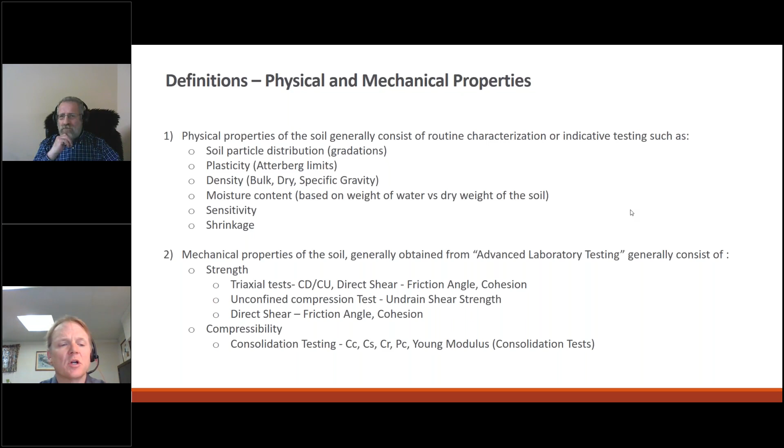These are some of our more routine tests and indicative tests that we use. Everybody uses these. They're very consistently used throughout the industry. Some of the mechanical properties that we're talking about, we've defined them more along the advanced laboratory testing, where we're looking at strength of material, triaxial tests, compression tests, shear tests, compressibility tests. So that's kind of the route we've taken with our physical and mechanical definitions.

So we're going to start here with our introduction. Many of our projects at TTC, we do have a lot of small sites that we work with. We also have projects with limited budgets, and that's pretty consistent throughout the industry. You have small projects, but also larger projects, and we all carry out routine characterization testing. The advanced testing, when it is carried out, many times, coming from a consulting background, I know it's very difficult to encourage a client to spend money on it.

It's very difficult to encourage a client to spend $2,000 or $3,000 on a single test, especially a triaxial test. So those are usually carried out in limited numbers, 2 or 3 at most, depending on your project budgets. Most times, I find, when I was working in consulting, it was consolidation tests that you could try and get carried out.

The end result is that engineers and designers tend to resort to more empirical relationships, based on your experience and what's been published in previous textbooks, papers, manuals, etc. Some of the concerns we've raised are: how relevant are these parameters to the soils that you're looking at? Is a soil from somewhere in Europe or Asia relevant to the Toronto area? Perhaps they are, perhaps they're not. It's hard to say. How many tests were carried out? Are they statistically significant?

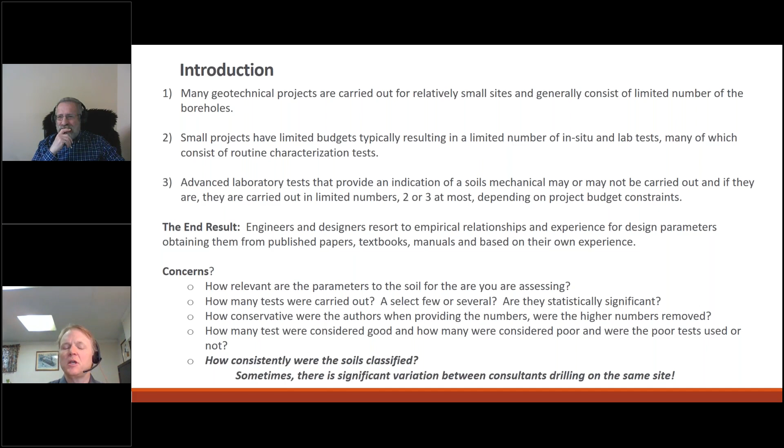Sometimes there's a variation between consultants, and we find even in our own projects, two consultants can go to the same drill site and come back with varied soil parameters and soil recommendations. Even down to the description of the soils can be different as well.

So our ultimate goal in what we're doing right now is to have a consistent method for grouping our soils for all of our projects. We're in the process of creating a database of both physical and mechanical properties, and eventually we're going to look at including some of the hydraulic properties for each soil group. We're going to continue to compile and add to this database over time. One of the things we also have to try and do is monitor and ensure that the soil groups are consistent and maintained so that we don't get crossover.

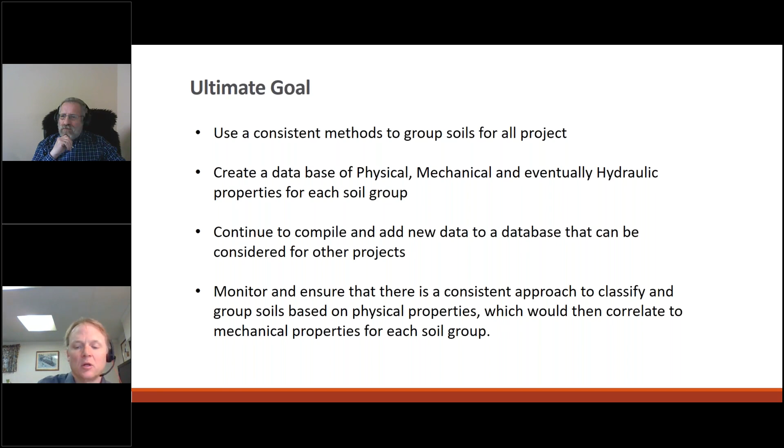So our data sources for this, some of the more well-known projects, are the Relief Line South and the Scarborough Subway Extension. Both of these have since been transferred to Metrolinx.

So we're going to start with our soil grouping. We established our soil grouping using grain size and Atterberg limits. Our initial assessment was on over 600 tests from our own projects throughout the City of Toronto, and we established 7 groups.

You can see them on the right side of the screen, G1 through G7. We did create 2 subgroups, a cohesive group and a non-cohesive group. Within the glacial tills, you have cohesive and non-cohesive glacial tills. As we moved down through the projects, we found that we also had cohesive and non-cohesive silts, so we broke group 5 into a non-cohesive and cohesive material.

Initially the system was used for our 2 major projects, the Relief Line and Scarborough Subway Extension, but since then we've expanded it to use for all of our projects and all of our investigations. It is allowing us to consistently organize the soils and all of our lab results.

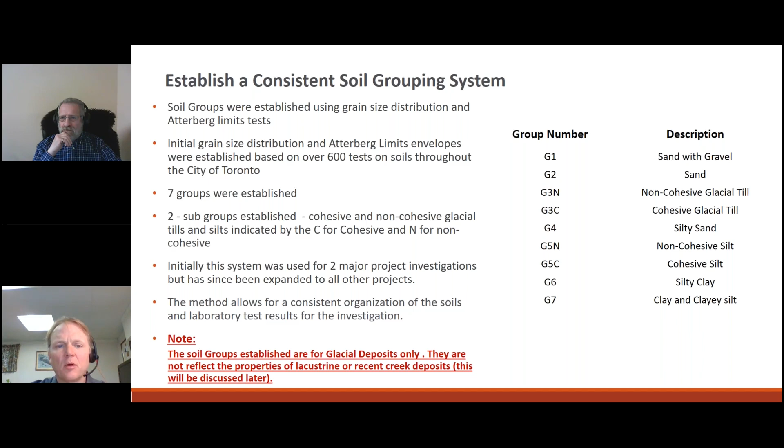One comment we have, though, is that this soil group is established for our glacial deposits only. They're not reflective of the properties of lacustrine or creek deposits. If you're working anywhere near the waterfront, any creek deposits, close to creeks etc., these soil groups will not work. We're still working on and looking at how we're going to classify those soils, but these are primarily for the glacial materials you'll encounter in Toronto.

So here's some of what we looked at. The thick black lines were our initial kick at the can, based on our 600 grain sizes. Then you can see the Relief Line and Scarborough results are the multicolored lines. We get fairly good agreement from our initial kick for sands and gravels, with a little bit of spread going beyond the lines. And for the silty sand, sandy silts, we had fairly good agreement as well.

We also did the same thing with our non-cohesive glacial tills and our cohesive glacial tills, and you can see that they bounce around a little bit. So based on our initial 600 grain sizes, we were able to revise and modify our envelopes for these, and this is what we ended up with.

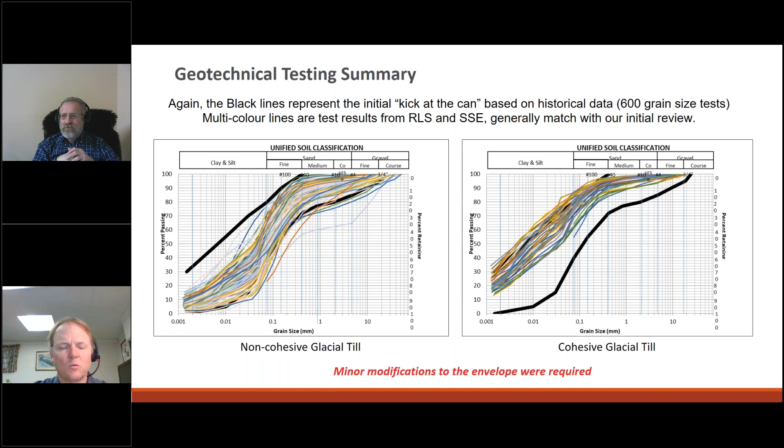So in this area, let's see if I can get a laser pointer — there we go. Up in this area we have our group 1, which is sand and gravels, group 2 on this side, and then we've combined them where we have our grain size with our Atterbergs for each group. So this is the non-cohesive, followed by the cohesive glacial tills, group 4 being the silty sands, and then we get progressively finer until we get to our group 7 down in this area, which is the clays.

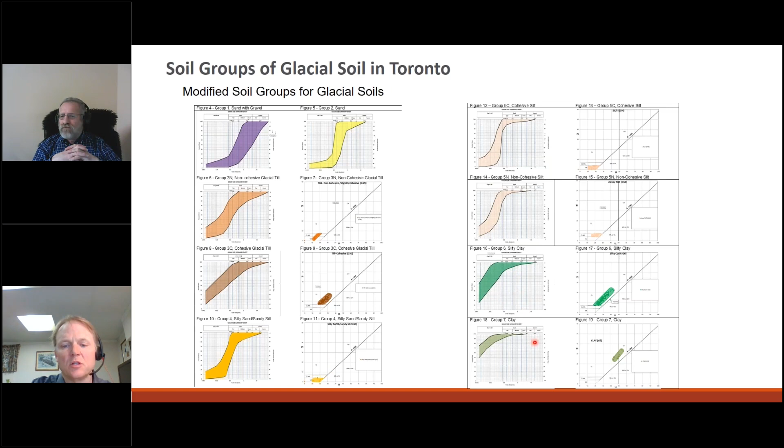So we get into the clays. Now with the physical properties, because we had two large major projects, we were able to combine everything and get a really good idea of the soils and their physical properties.

So we've come up with a number of charts you can see here for moisture content, for example. This is all of our soils by group, starting in the upper left for group 1, sands and gravels, all the way down to clays in the lower right, G7. These charts are based on about 8,000 to 9,000 tests in total. In both projects we did a moisture content on every single soil sample that was pulled out of the ground, and this is our result. So we have a pretty good feel now for moisture content of the glacial soils in Toronto.

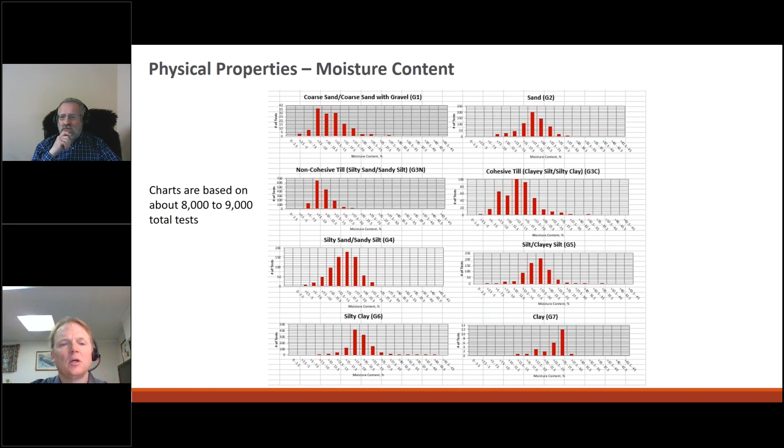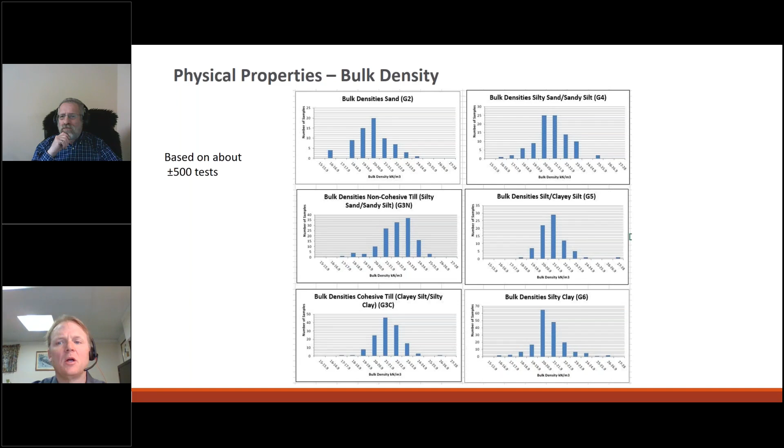We also did the same thing with our bulk densities. You can see here the physical properties for bulk densities, and we have about 500 tests in these ones. So we have a really good feel for what the materials are and what the bulk density is.

Some recent developments that we've had: portions of the Downtown Relief Line and some recent investigations carried out at Queens Quay for the waterfront LRT modifications, as well as at Greenwood Yard and Russell Car House. We did have — oops, things are moving a little bit here, sorry.

We did have some issues with our group 5C, which is the cohesive silt, and the plastic limits for G6. What happened is the materials plot out under 5C, or the silts, but they behave more like a group 6, which is on the plasticity side. I'll show you this next.

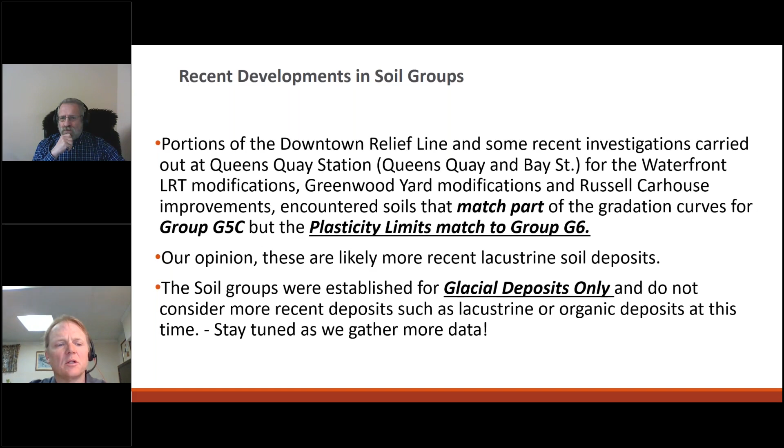Basically, this is where I was saying earlier that it's our opinion that this is the lacustrine soil deposit. Okay, sorry, something's happened. But here's where we are now. So we have the glacial soils.

This is our initial kick at what we said for our group 5. You can see our group 5 for the clayey silt, group 5 cohesive, is down in this range. When we plotted out those lacustrine deposits, we tend to get higher, good agreement here. It's a little bit higher down in this area. But then when we plot out the plasticity, it plots in this area, which is more of a better fit with the G6.

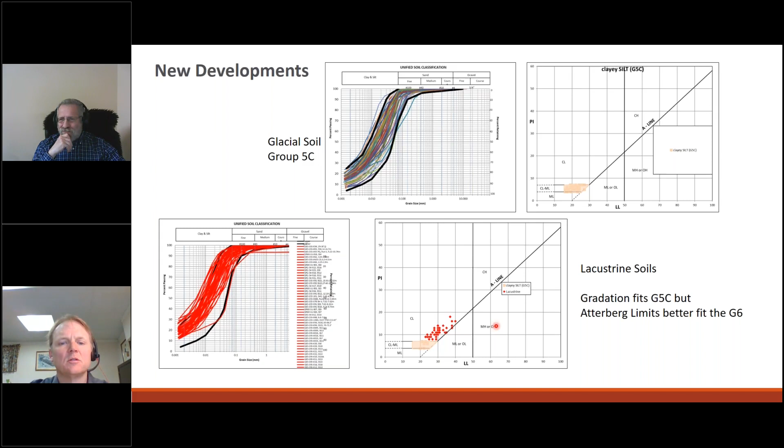So at the moment we're still debating how we can classify these materials, so just stay tuned for that. And like I say, down in the waterfront, anywhere you have a lacustrine deposit, you're getting those changes.

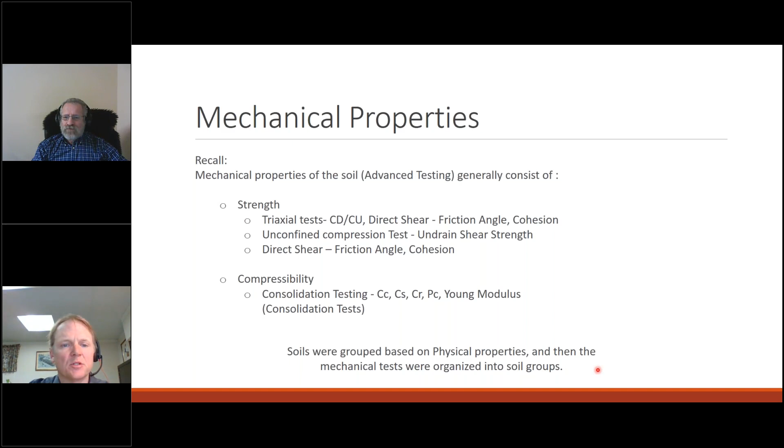We're going to talk a little more about mechanical properties and our focus. These are our mechanical properties from our definition, and we've grouped them based on our physical properties. So here we have our consolidation results from our consolidation tests. We're showing our group 5, which is our silts, clay silt materials, and these are the cohesive materials, our silty clays and our cohesive tills.

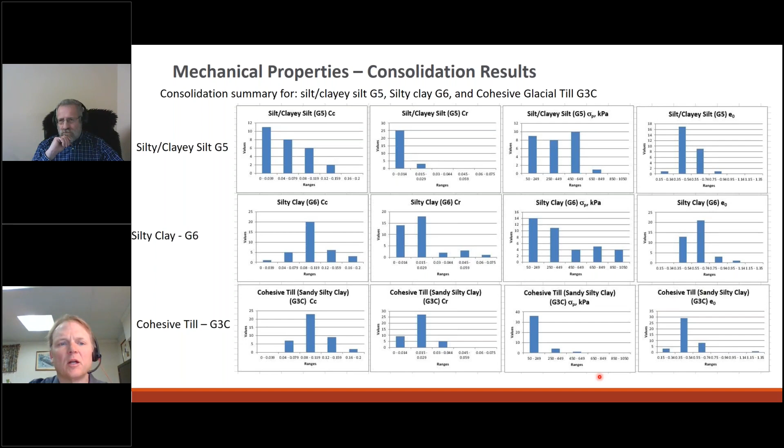And we've got a number of values that we're hoping will create a good database for us to use in the future. What I'd like to focus on now is some of the triaxial results.

With the characterization tests, just as an aside, to give you an idea of the number of tests we were looking at, we had about 1,200 gradations and 800 Atterbergs included in our summaries. Our advanced testing has about 180 sets of triaxial tests, or about 540 specimens. This is combined for both the relief line and the Scarborough subway.

We think this is enough data that we can be fairly statistically significant, if I can say that right. So for our triaxials, we're going to go through some of the techniques that we used here.

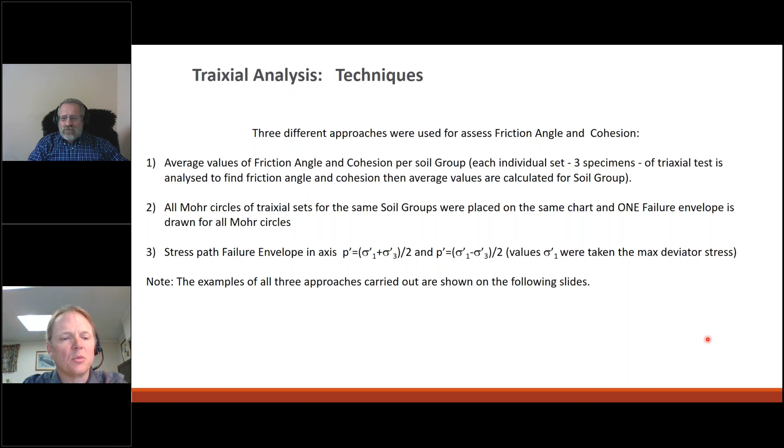We used 3 different approaches to assess our triaxial results. You can see some of them here, and they're outlined in the next pages. We looked at individual tests, we looked at combining all the tests under the same soil group, and then we looked at using all of the tests combined using the stress path.

Here's our first one: we would do a set of triaxial tests, come up with our Mohr circles, plot them out, come up with a cohesion intercept and friction angle, and then add that to our database.

The third method was we looked at all the deviator stress, and plotted everything out for the stress path method to come up with these values. Our intent here was to ensure that all 3 methods gave us consistent numbers. So, again, what did we find?

There was a little variation amongst the methods used. For our downtown relief line, for the G4 soils, which are the silty sand, sandy silts, when we used the Mohr circle we were getting something around 45 degrees. When we used the stress path, we were getting about 48 degrees, so somewhat higher. We also found that the cohesion was not equal to 0 at certain points.

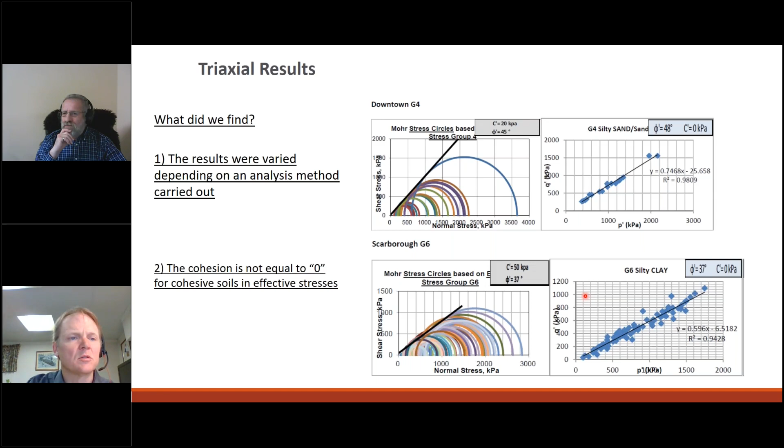So then what we did is we looked at and said, okay, how do our results compare between our work at Scarborough and the relief line south? And where do we stand with these? So we looked at and summarized all of our results by method. And you can see here we have our Mohr circle summary, our stress path graph summary. Okay, and we did it by Scarborough as well as the relief line south.

Okay, and we found that the average friction angle between the 2 sites varied by 2 or 3 degrees. Okay, there was some variability in the cohesion between the 2 sites as well. The cohesion varied depending on how the tests were analyzed. Was it a Mohr circle analysis, or did we do it through using stress path?

Since we had reasonable agreement with the friction angle, we figured that we could combine our sites and combine these materials into one soil group. So we took the G1 from both sites and combined them into one master table. So that gave us, like I said before, about 500 test results that we could use.

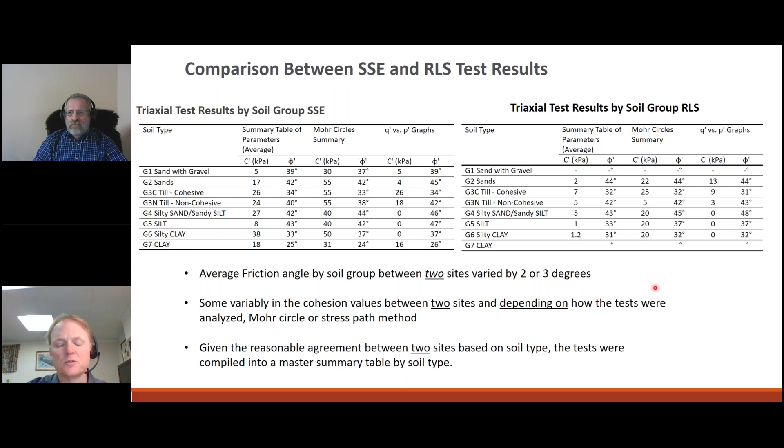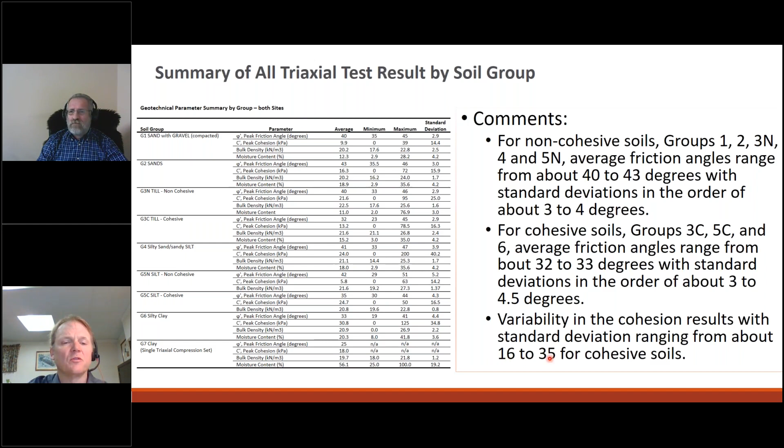There was some variability in the cohesion, and we did have some standard deviations ranging from about 16 to 35 for those cohesive materials.

One of the interesting things we did with our two projects is we did a sampling method comparison. So in the initial stages of the investigations, we were obtaining samples using both the PQ method and a sonic method. What we found interesting was that the samples returned from the sonic samples.

Oops, something happened there, sorry. Let's go back to here, there we go. So apparently my computer has done something weird. Hopefully that doesn't. Technology, what can we do? Yes, exactly. So something's happened there, and I'm hoping this comes back.

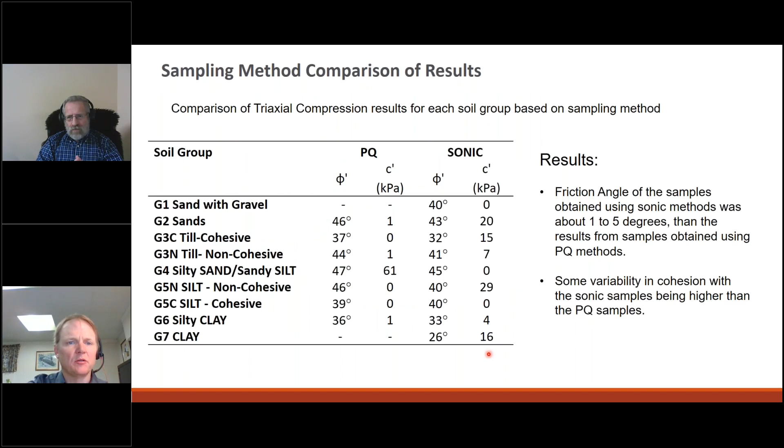Once we had completed all of this work, we carried out a literature review, and we wanted to know what's being used in industry. So we did a literature review of the combination of development submissions and work that TTC has carried out. And we found that for non-cohesive soils, friction angles ranged from anywhere between 28 to 30 degrees to upwards of 38 to 45 degrees. So for a non-cohesive soil, there was quite a range in our literature review.

With cohesive soils, we found that the friction angle ranged from about 20 to 40 degrees. And what we also found is there's very little information on cohesion values provided in the literature. Now, based on our test results, we looked at the non-cohesive soils and said, what's the average friction angle range? And we said it's somewhere between 40 to 43 degrees, which is the upper range of what we saw within the published literature. For cohesive soils, we found the same thing.

We looked at it and we said, okay, what's the friction angle that we actually measured? Again, if you recall, we were looking at 32 to 33 degrees. That's about the mid-range of what we see from various literature sources. And then our cohesion values, our range was between 13 to about 30. But again, in the published literature, there seems to be very little information regarding cohesion.

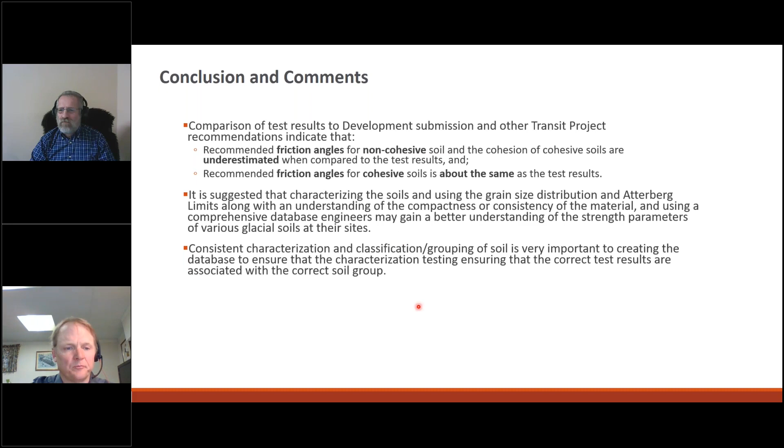Sorry about that, everyone. It's suggested that characterizing the soils using the grain size and the Atterberg limits, along with a good understanding and a good database, we can get a better understanding of our soils, especially the glacial ones. And we have now created this database. What needs to happen is things need to be consistent in your classification process. If a material is misclassified, and we'll talk about that in a minute, it causes some problems in your database.

What we also say is that although we have a database here that we can use for design, I would recommend that it be something that's used for preliminary design. You still need to consider doing some sort of site-specific investigation and testing, okay? And I think these databases that we're creating are going to give some comfort in selecting soil parameters.

There we go. So some ideas, some suggestions for your consideration as geotechnical engineers and scientists: always review your soil samples in the lab. Always, pardon me, always select representative tests of each material to carry out your characterization tests and get the physical properties. These include your typical gradation, Atterbergs, and confirm your visual descriptions.

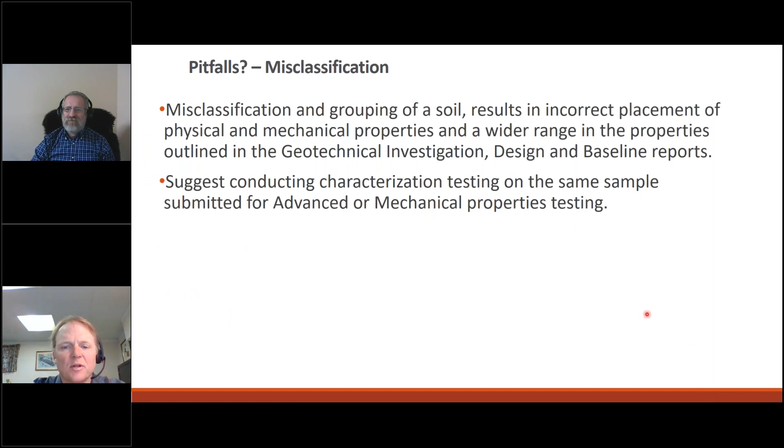So we have a couple of examples here, if I can ever get back to it.

Here's one here. So the classification, again, based on our visual, we get silty clay with sand, typical classes. This is an actual example from one of our logs. But then we have what is now returned as a plasticity index of 1. We got a PI of 1 here. Grain size, you can see what it's showing you. It's showing you something that's in a silt. Maybe it's a silty sand, sandy silt material, right? And looking at this unit weight or density, it does not match as well.

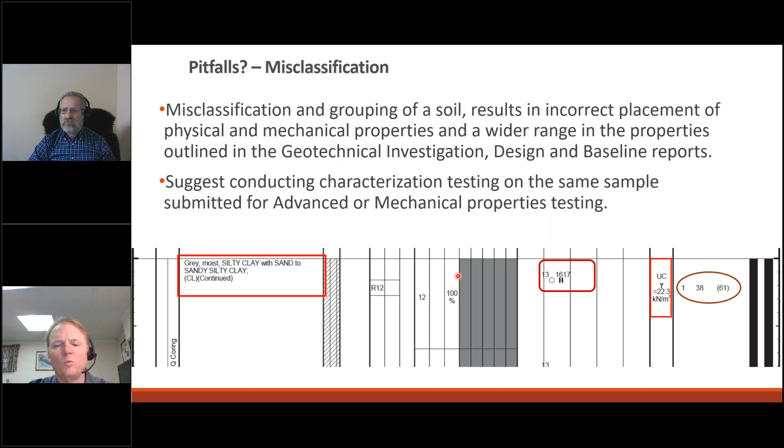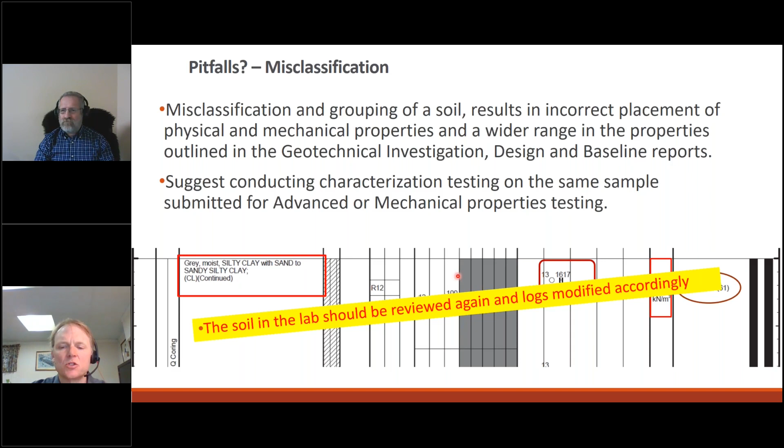So what you have is somebody's going to have to go back, take a look at these values here, take a look at the descriptor, reassess this soil, and perhaps this soil here needs to be modified. Maybe there was a layer that was captured up in this area, okay? Leaving this in, it will skew the results, like I said before, of all of your results in your summaries, okay? This soil should be reviewed in the lab, and the logs should be modified to make sure that everything is in agreement, okay? Here's our misclassification part 2, okay?

We submitted 2 samples for triaxial testing from the same run. One had a set of characterization indicative tests carried out, typical moisture, grain size, limits, etc. If this was to be considered representative for both, and we had not tested the second sample for moisture, grain size, and limits, we would have misclassified, or this material would have been placed in the wrong or incorrect soil group. And I can show you here what we have.

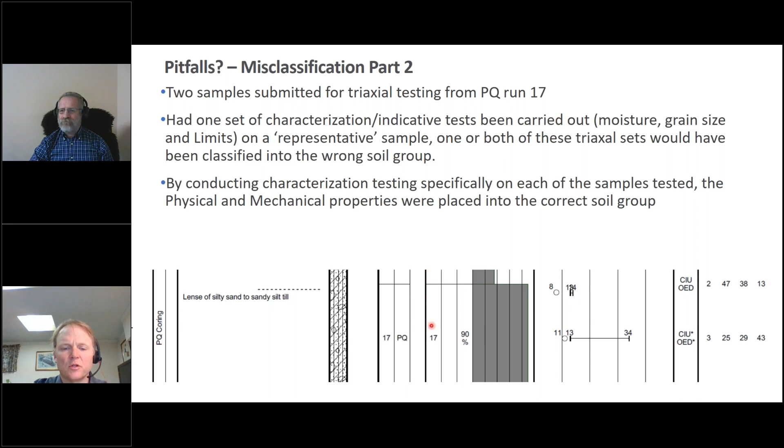So this was our first test from the upper portion of run 17, right here. And this comes up as a sandy silt till. And then lower down we have, you can obviously see with the PI what it is, it's a silty clay till. 2 different materials from the same core. Just be very cognizant that you don't want to misclassify, because if you do, you can see where it would change your ranges in your final reports.

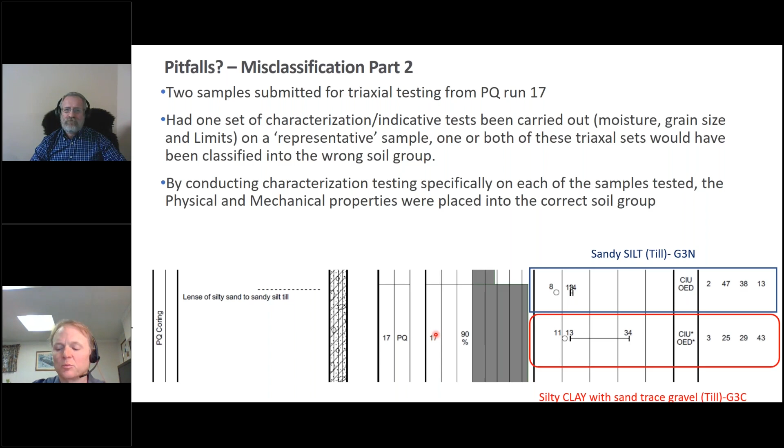Also by soil group, what we're looking at is what's our initial void ratio. I think we saw some of that earlier on. We have some graphs of the initial void ratios from consolidation tests. We have the moisture content, which I showed you earlier. And then we're looking at also probably including something about hydraulic parameters as well, and the permeability. And that comes to the end of our presentation.

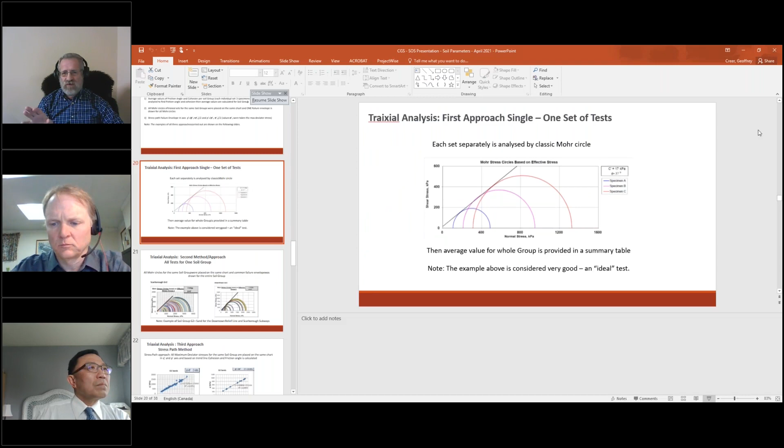Yeah, this one here, this is the tangent to the Mohr circles. This one, by the way, is the ideal perfect test. In many cases, you don't get such a nice tangent to three circles. That's first. Secondly, like we told, we checked one by one. That means each set separately, and calculated friction angle and cohesion.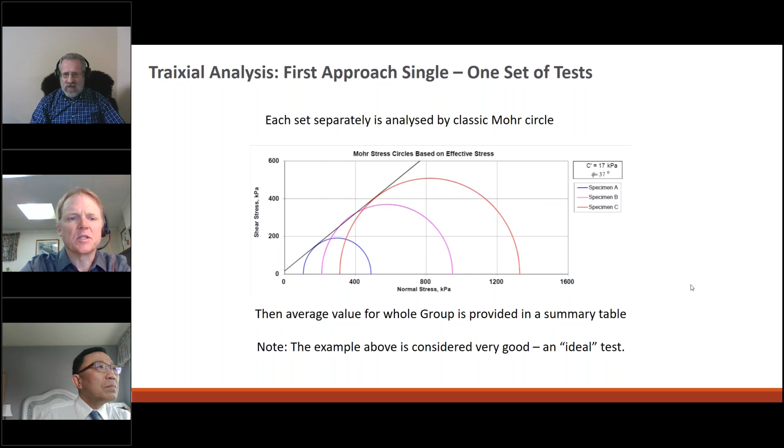Then we combined all Mohr circles for the same group type and made an average envelope, on the next slide, 21. Yes. So this would have been for a single set of tests for one sample, so you got 1, 2, 3 circles, and the next set is where, like Dimitri said, we grouped all of the triaxial test results for all samples of the same group, for both downtown and Scarborough.

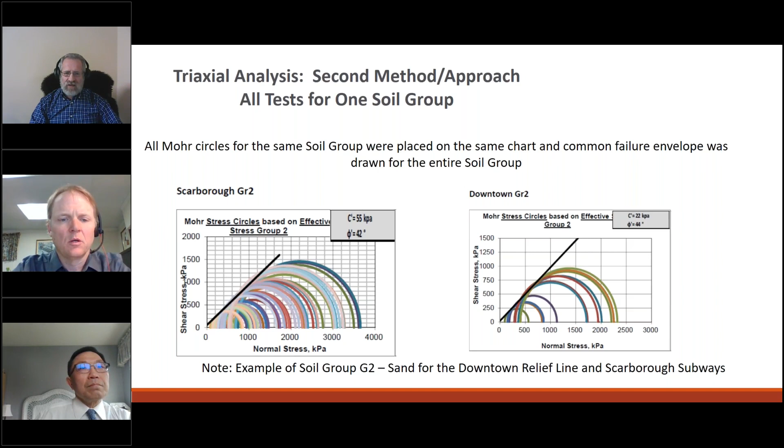And the last one is stress path, so we took maximum q prime and p prime, like sigma 1 plus sigma 3 divided by 2, and we plotted these values.

This one, first time I realized, because all literature says cohesion for clays in effective stress is 0. At some point when I started reviewing all these charts, I started understanding why everyone in any book says cohesion in effective stresses is 0. Because maybe professors or researchers just use stress paths, they didn't rely on Mohr circles or separate or average.

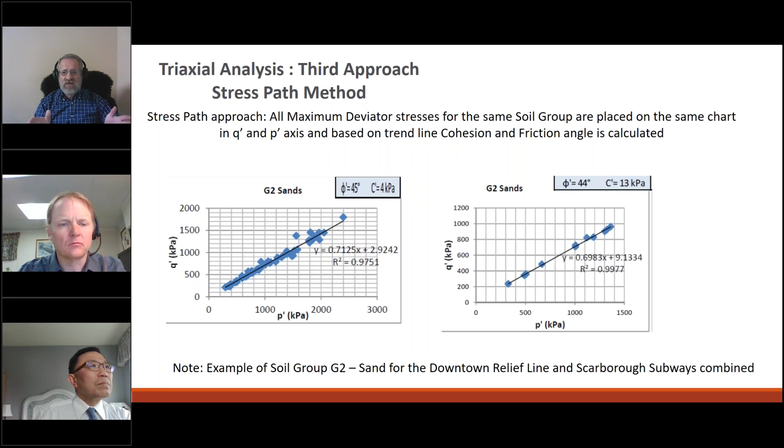And it's exactly what we showed during our summary tables. There are differences depending on how you analyze your tests, and you have deviation. So some people say for the tangent you should go to 0 with small confined pressures during the test, and it's not a straight line, it's going to be curved.

Yes, but guys, keep in mind when you apply this in the lab, if somebody asks you to apply effective confined pressure of 20 kilopascal or 15, you already start dealing with machines and how exactly you can keep this 20 kilopascal, because during compression it's going a little up, a little down. So you really cannot assess if it's truly curvature or not, because it's already technical issues. Everyone who worked in the lab, all lab managers like in Golder, in GHD, in Wood, know this very well. So sometimes engineers ask for something but don't know the limitations of specific equipment, and you get stuck with it.

Yeah, sorry, maybe I'm answering questions, maybe not.

I think the interpretation of the data has to consider many things, as you explained. So I think we can go to the next question, and if the person still has a question, I think he's welcome to contact you for further discussion.

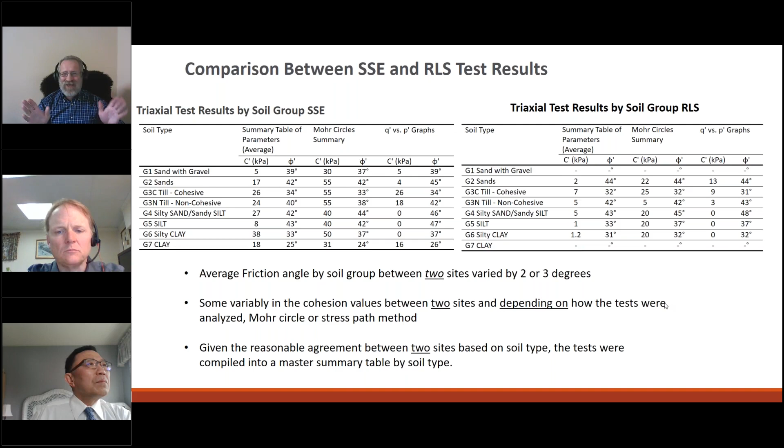But the relief line, we may have had a couple of samples. Yes, from relief line, yes, but we didn't have the chance to really delve deep into comparing if there's a difference with Shelbys. It's like, guys, that's the next level. We just combined this data, it was already a big headache.

One of the reasons we did the sampling comparison, as I've just thrown it back up on the screen here, is that with the PQ method we were losing material. On one project, because it was such a rush, we were losing sample with the PQ method and only getting cohesive materials back. With the PQ rig, we could do a full depth PQ core in about 6 to 7 days, whereas with Sonic we could do it in 2 to 3 days depending on depth. Specific to the Scarborough project, we were doing 60 meter deep Sonic tests taking 2 to 3 days, but the PQ was taking upwards of 6 to 7 days to reach the same depth. So with the urgency of the project at the time, that's where we did this comparison.

It would be nice to compare the Shelby samples with these results and see how it all comes together. But again, the Scarborough soils were so hard and dense, it would not work, most of the blow counts out there were 100 plus. So you could not push a Shelby into that material.

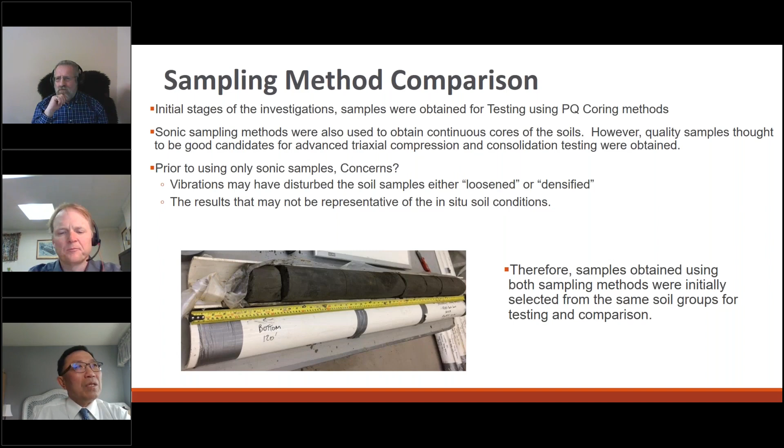So the next question is, as in one of the presentations, you compared the results of the database of the interpreted data with some literature. So is the geotechnical condition described in that literature local or Canadian soils, or international soils? Can you comment on that?

Sure, I'll just bring the screen back up here where we show what's being recommended. These recommendations you'll see in the list were strictly from development reviews submitted to TTC. These are developments within the city of Toronto, and when we say transit projects, it's any transit projects within the city. So these comparisons were done specifically for projects within the city. Everything you see here is for the City of Toronto.

Yeah, then how about the reference? You have a comparison with reference literature and there's some difference. So how about that literature - is the soil collected from worldwide, or is it also local soils in GTA or Canadian? Just give an idea about the soil condition of the reference literatures.

I think it was from this one here. Can I just add, in addition to what Geoffrey said - so we took development reviews, transit projects, and also compared, remember in our article, table number 7, we also used Hansen, Meyerhof, and different manuals - EPRI, Thorburn, Meyerhof, and the structural foundation design manual. So we took different sources, not just from the Toronto area, but different books and sources worldwide, like what ranges people use for different types of soil based on SPT, for example.

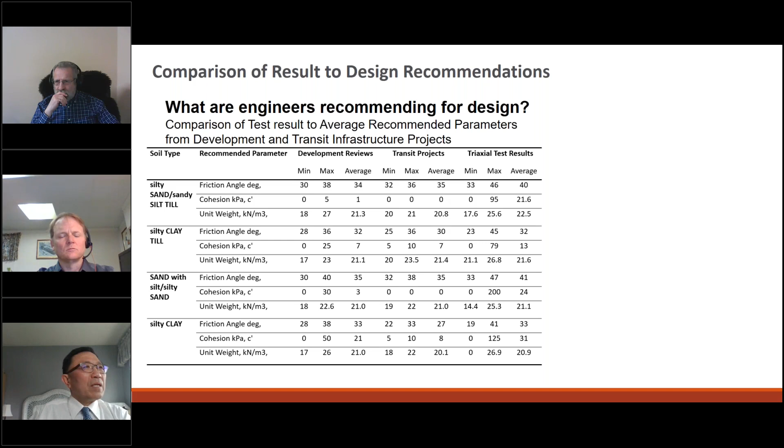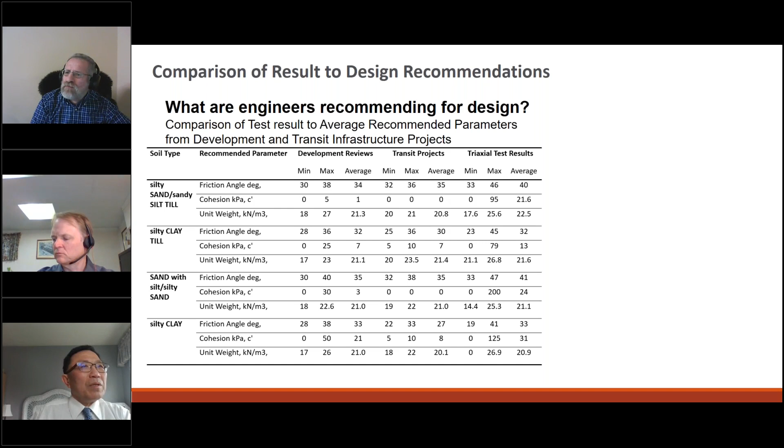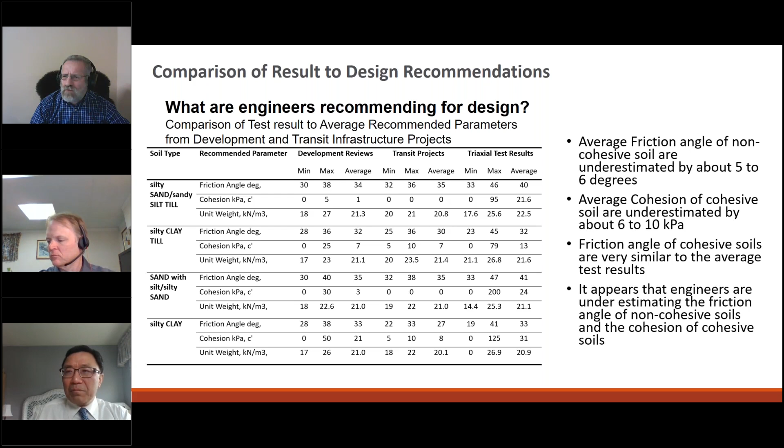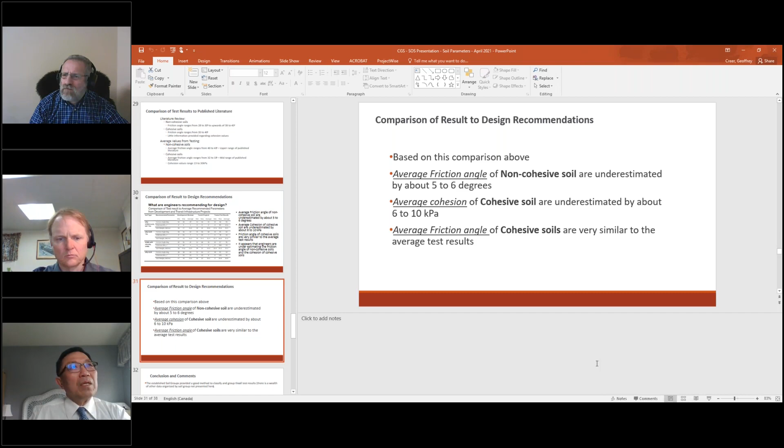The next question, I combined several questions together. I think the main question is, for your grouping and comparison, can you also include some typical data we can collect, especially the N values for the cohesive material? Of course, the upper limits of the data, and probably also, because we're dealing with material in the downtown area, the OCR, over-consolidation ratio, may also be one of the factors impacting the parameters. So just for your consideration, maybe you can incorporate that information together with the different interpretation data - I think it would be pretty helpful for the geotech engineer to understand the properties.

Can I answer, Geoffrey, and you add? Yeah, that's fine. So actually it's exactly what we are planning to do and what we're doing right now for the next conference in Niagara Falls. We are doing exactly what they asked about - the over-consolidation ratio. All these parameters are going to be combined for Plaxis and FLAC software, and definitely more parameters such as OCR or E50 reference, Eur reference, which are generally used in software, we are going to incorporate in this one. And Geoffrey, maybe you can add.

Yeah, that's a GeoVirtual plan, and yes, it would be nice also. That's one thing we still have to look at, cross-referencing N values and water content with some of the strength parameters, friction angle, etc. In the GeoVirtual paper we did, there is a comparison with our results to some published data, Terzaghi's chart and that. We did try some comparisons there, but it would be nice to correlate what we have. Right now we're working on some finite element and finite difference parameters that can be used, and hopefully we can get into some of the other stuff as well.

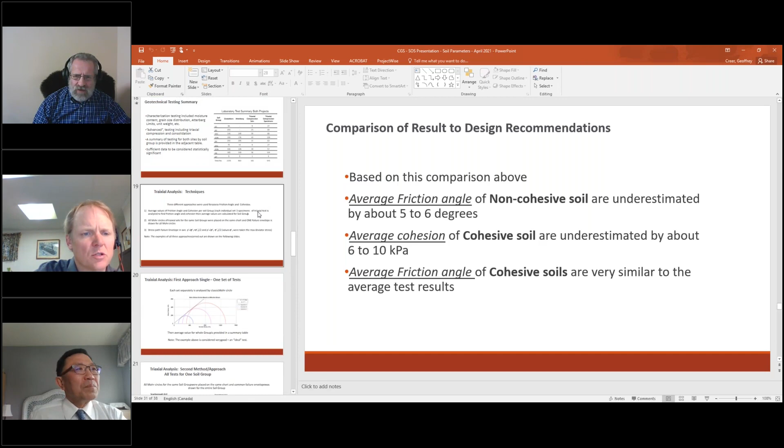So is this the cohesion values? Generally, yes. For cohesions. So for the cohesion values. I'm just trying to find it here. So the question is, if we encountered in literature a comparison between Mohr circles and stress paths,

how different the results are. Personally, I searched maybe the last 15, 20 years. I've never ever seen it. Maybe somebody made it, but it's buried somewhere under a huge amount of papers. It's exactly the point why I couldn't understand why everyone talks about cohesion in effective stress being 0, because with this big project I could literally sit down, summarize all data, and see differences.

But I never could find any articles or textbooks explaining these differences. Everyone talks about a very generic approach and then immediately starts dealing with numbers. I've never seen an article about that. If somebody does know, I'd really appreciate if you can send it to me.

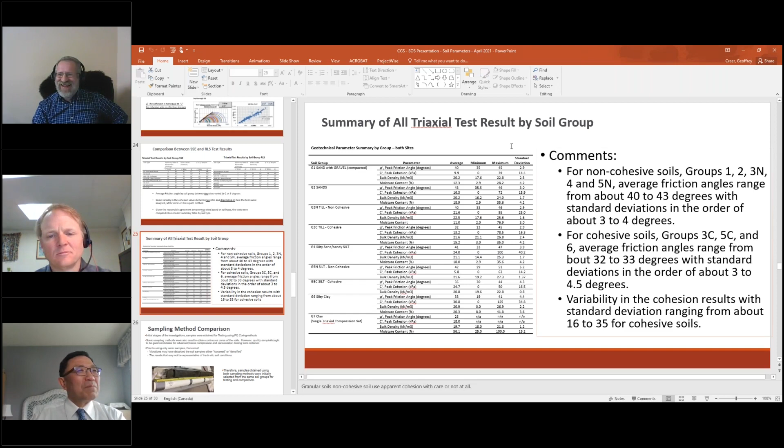Okay, then the following question: what's your advice to interpret the engineering properties between the stress path and the Mohr circle method? Okay, go ahead, Geoffrey.

Really, it's up to the individual engineers and the designer to make that call. Once you've done your analysis, my suggestion would be to do it both ways and compare. Sometimes companies will say we only do Mohr circles, sometimes stress path. Personally, I think you would have to look at both, see what you get, and how you are with those results.

And I'd like to add, it's definitely up to individual engineers to decide what number to take into account. We just present it for the GTA. We did so much analysis for the GTA area, and I'm pretty confident. If you move 300 kilometers north, south, west, east, I have no idea. This is why I've never relied on literature textbooks saying this clay is 25 degrees. Where did it come from?

It may be from South America, the Middle East or Africa; it's not relevant at all to the specific region you are working in. Any textbook says you have to take local values, because if you move to Ottawa and you have Leda clay, it has nothing to do with our clays. In Sarnia we have blue clays, also not relevant. But for the GTA, I feel pretty comfortable with these numbers.

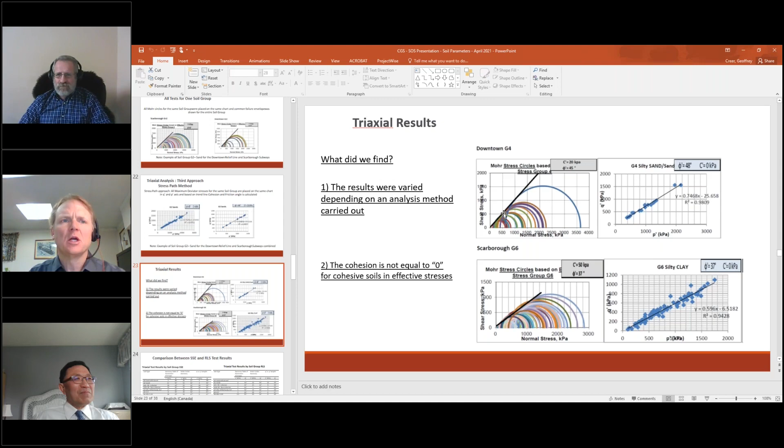But I think for a structural engineer, what it comes down to is it does fall within the geotechnical. And yes, you can look at those parameters, let me flip to those average values somewhere. Here's some here. You can use those values as an average. But again, it comes back to the characteristic values. These are averages, which, like I said, are underestimating our granular materials. But somebody's got to select at some point a characteristic value, whether they have to consider the standard deviation or not. That is up to them.

I know when we were working with the Scarborough line, we did a presentation table, which is a very large table of all of our values, and then we gave the 90th, 50th, and 10th percentile as well, so that the analysis could be carried out and the parameters could be varied. We could see what was going on when they started doing the liner design, and they could vary things around. But yeah, okay.

And we have very limited time left, but just a last question. As you present, will your soil classification system be modified based on the available data and based on the result of your interpretation?

So the classification system or the grouping that we've created will be modified eventually. We already know right now, working towards the lakefront, we're already finding lacustrine soils, like we showed in our example, that don't match. The physical properties are not matching into one of our 7 soil groups. And yes, we will most likely have to modify this. Maybe we have to add something we call a group 8 or 9 or a subgroup somewhere.

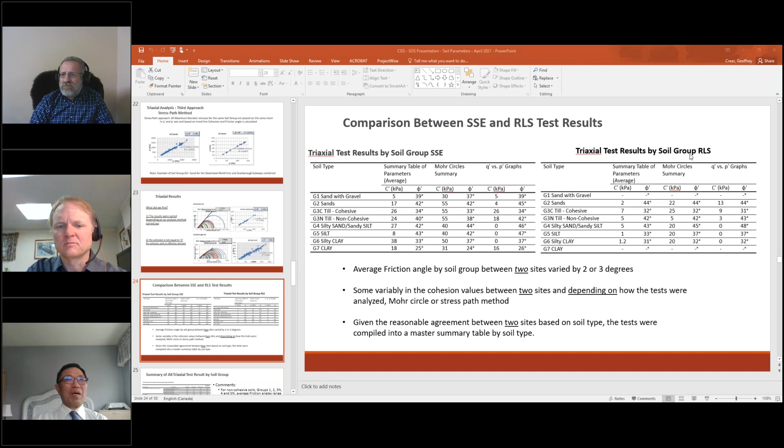Okay. I think that's the end of the questions and answers, and we are at a perfect time to end this wonderful webinar. I know there are still some questions that cannot be answered, and after our discussion the attendees may also have additional questions to discuss with you. Anyway, this is a very good process and contribution to the industry. I think all geotech engineers support your approach, and expect to have more opportunities for you to share the results of your research and interpretation.